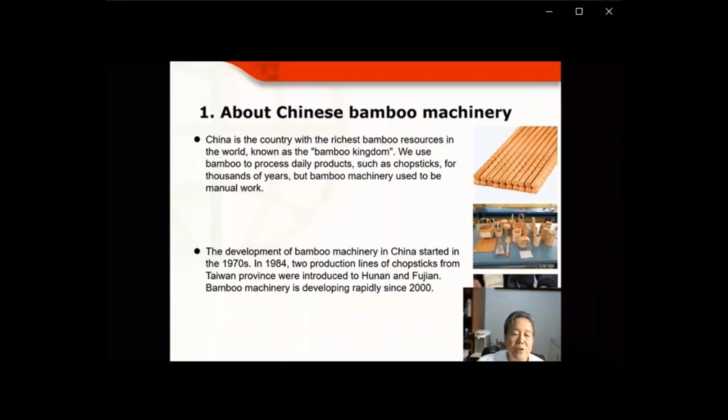Bamboo machinery in the world. First, I would like to introduce what bamboo machinery is. We define it as all the machines and equipment which deal with bamboo. The difference between bamboo processing machinery and wood processing machinery: the same points for lumber and wood-based or bamboo-based panels include hot press, saw cutting, milling, sanding, and drilling. Only used in bamboo industry are split off, wire drawing, extraction of bamboo juice, and textile processing. Why? Because of the difference in bamboo physiological construction, chemical components, and product uses.

The world status of bamboo machinery: for bamboo machinery research and development, there is a great regional difference across the 3 largest bamboo areas. In APAC, there is relatively complete processing machinery and equipment for bamboo crafts, bamboo furniture, bamboo construction, and bamboo papermaking industry, mainly in China, following wood processing machinery. Now it is half automatic and mechanized.

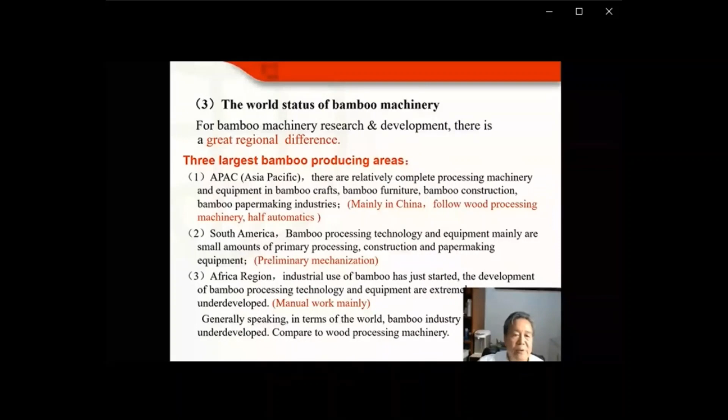The development of bamboo industry in Africa is very slow, hovering in the stage of agricultural culture.

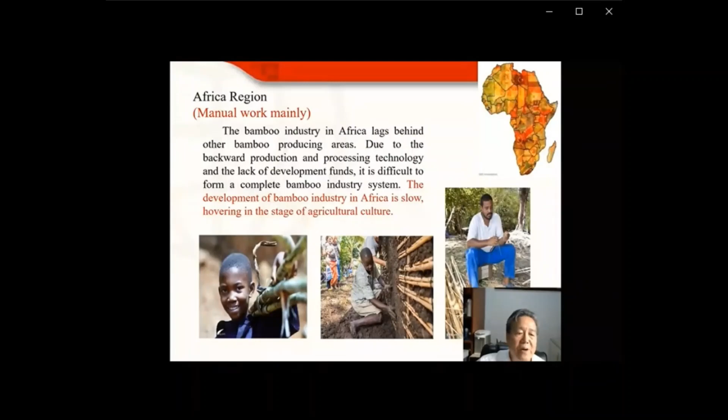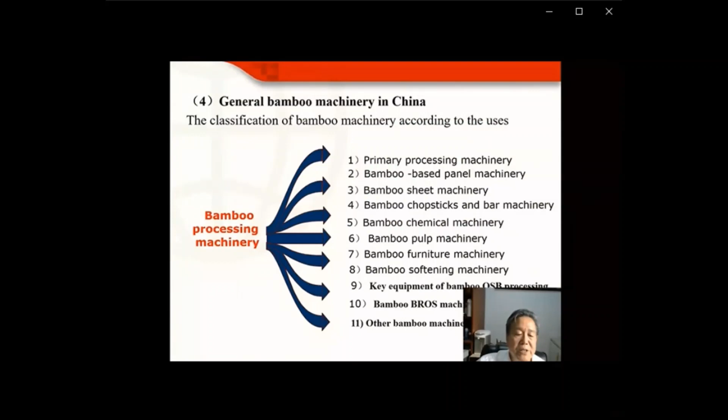General bamboo machinery in China. The classification of bamboo machinery according to machine uses. We have 11 kinds of machinery in China, including processing based panel, sheet, chopstick, bar, chemical, pulp making, furniture, and softening machine, and also OSB machinery. Here is a special technology about bamboo processing: bamboo BROS machinery. Later, I will mention what's bamboo BROS. Primary processing machinery: sawing machine, green shave machine, splitting machine.

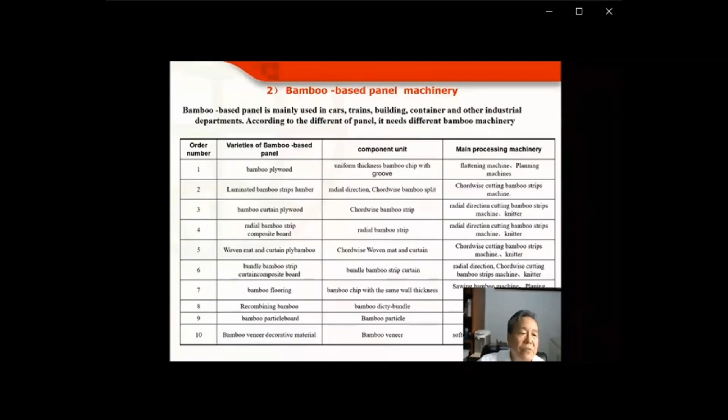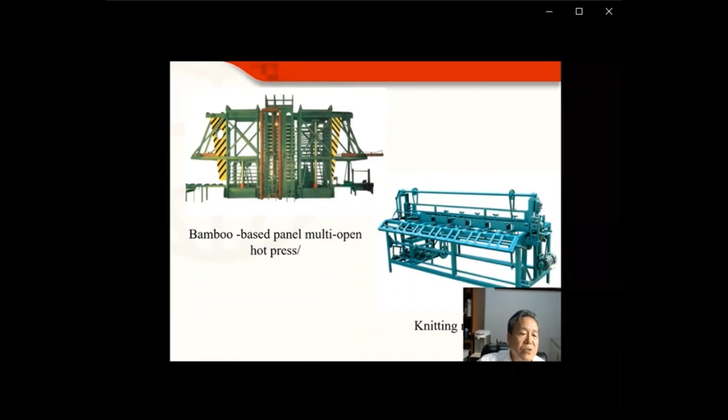Bamboo-based panel machinery. We have a lot of kinds of bamboo-based panel machinery in China, and we also set up a lot of production lines. Here I give you 10 kinds of different bamboo-based panel machinery: a multi-open hot press knitting machine, bamboo flooring machine, multi-blade saw, floor trimmer, forming machine, floor milling machine.

Bamboo sheet machinery. In this field, the machine is a high degree of automation and world advanced level.

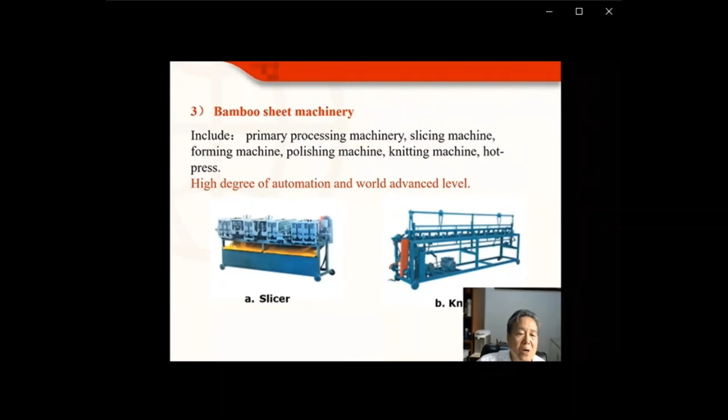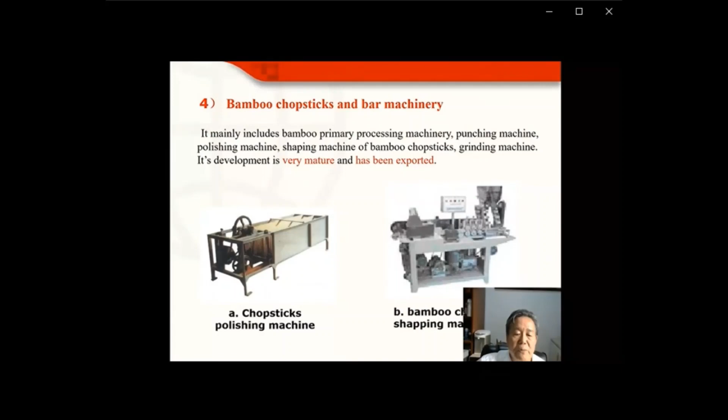The bamboo chopstick and bar machinery is very mature. A lot of machines have been exported: chopstick polishing machine, chopstick shaping machine, bamboo chemical machinery.

The level is just behind the wood paper making machinery, but in China it's leading the world. Here is a hot refiner, then bamboo pulp washer.

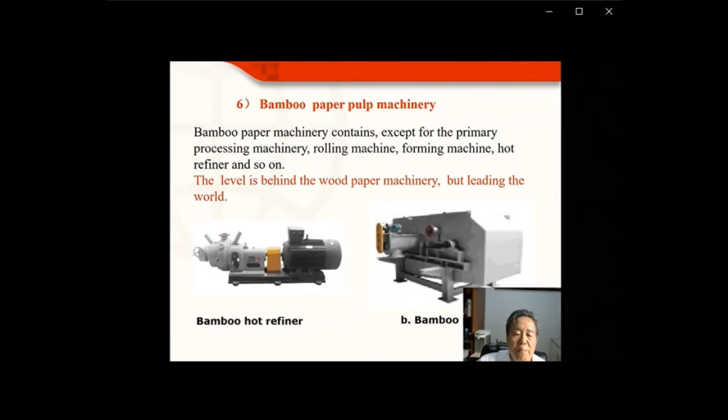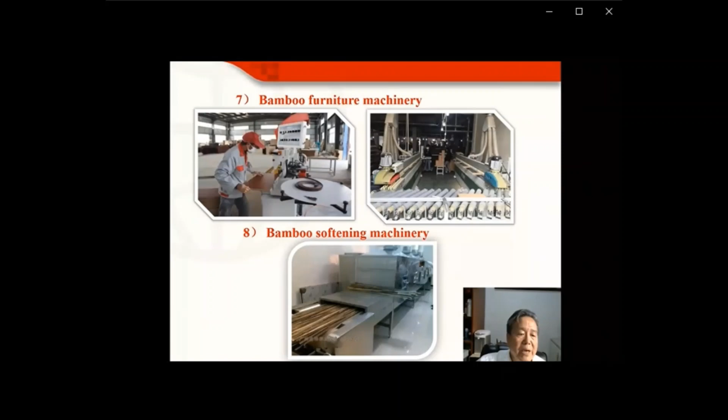Bamboo furniture machinery. Normally we make small furniture with bamboo softening machinery. It's quite different from wood. We can make bamboo softening.

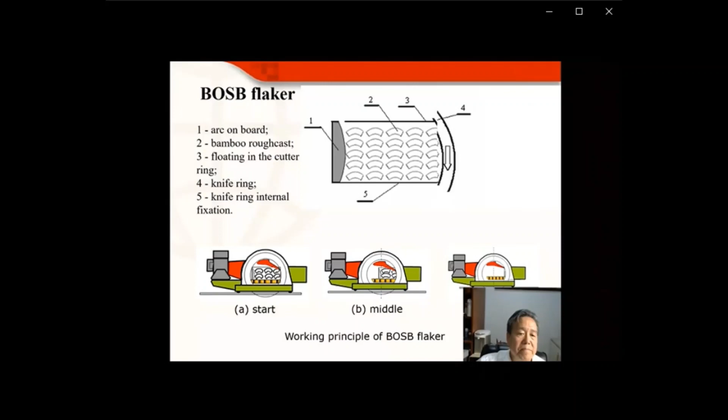And here is OSB processing. We use bamboo to produce oriented strand board. We call it BOSB. The picture is the bamboo flaker. You can find how the bamboo flaker works, like this.

Here is the bamboo OSB, the first board in China. Bamboo recombining the original status - we call bamboo recombining in original status BROS. I invented BROS in 2006. We can recombine bamboo pieces in original status without making it into fiber or particle.

Here is a milling machine and a high frequency press. The shaping machine of 6 side, finger joint machine, assembling forming machine.

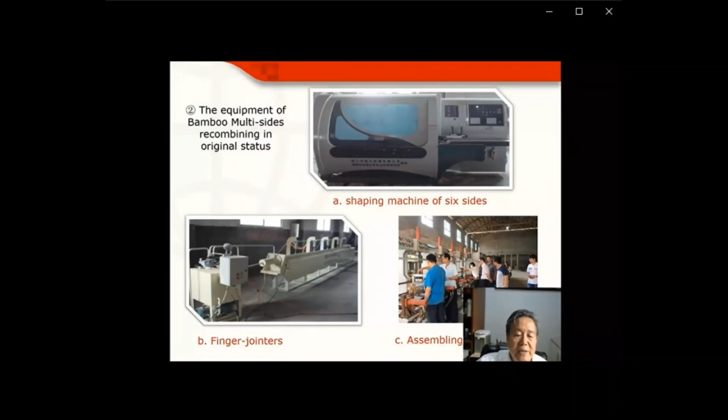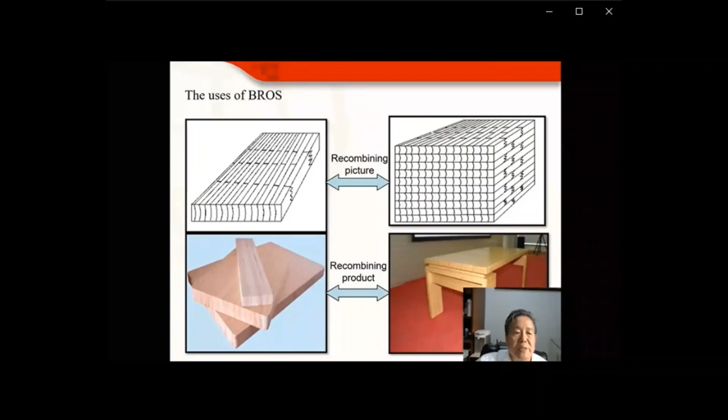We can use the BROS to make furniture or construction. Here also we can make the BROS board into BROS lumber. Here is a table. On the picture, you can find all the furniture were made of BROS material.

Other bamboo machinery: bamboo silvicultural machines. Here we give you 5 kinds of machines. Most of them need to be solved, to be developed in China.

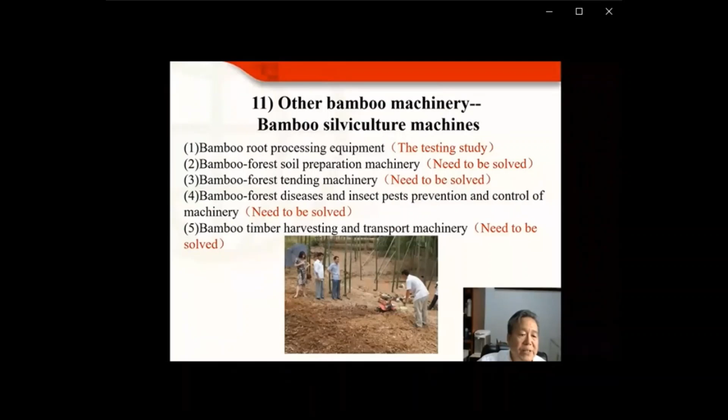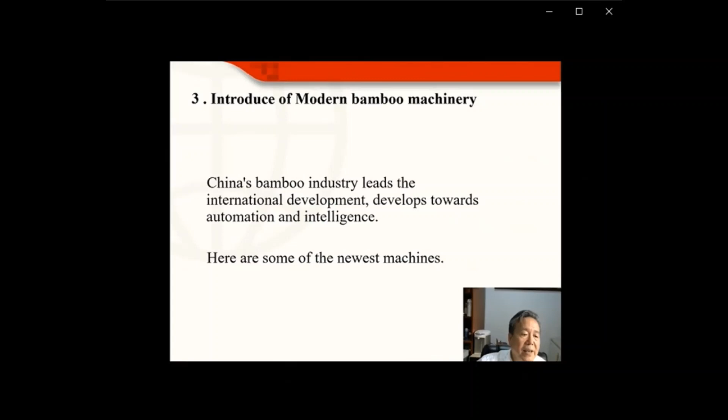Now I would like to introduce some of the modern bamboo machinery in China. China's bamboo industry leads the international development, develops towards automation and intelligence. Here are some of the newest machines. You can see them on the video.

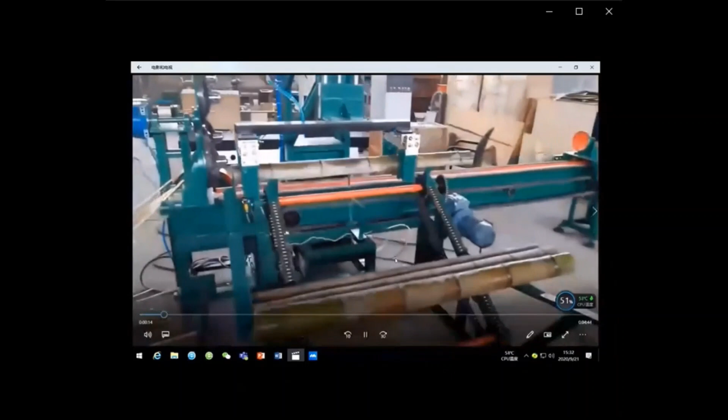Here is automatic bamboo splitting equipment. For the older ones, splitting machine, in order to choose the right knife, need the operator to measure the diameter of bamboo pipe by hand. With high labor and poor safety, the new machine can finish automatic feeding, grading, knife changing, and alignment.

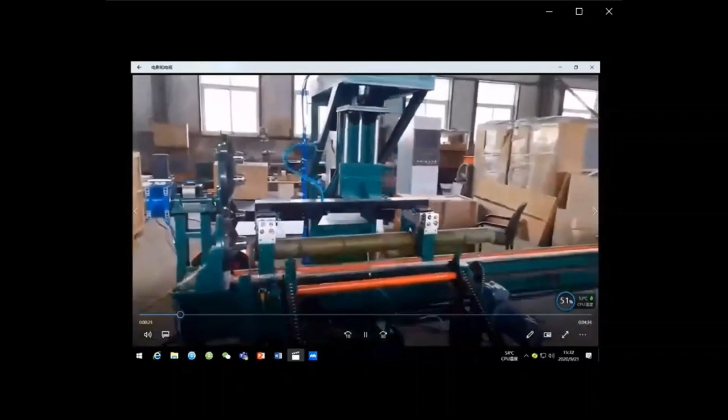You can see here to measure the diameter by the machine hand. There are 4 star knives.

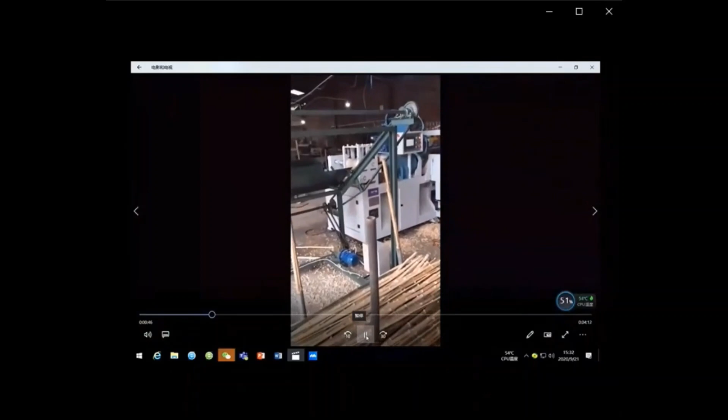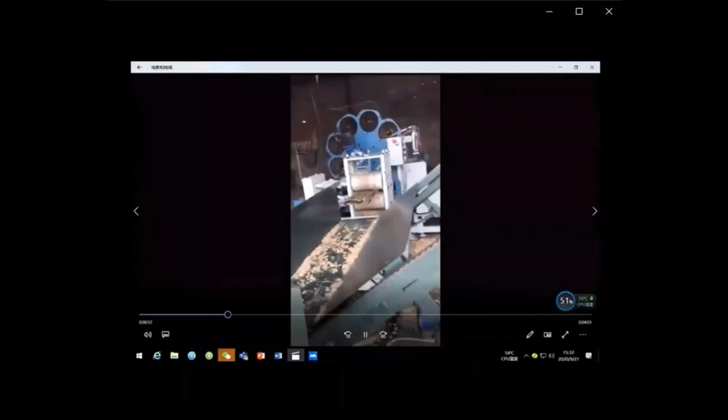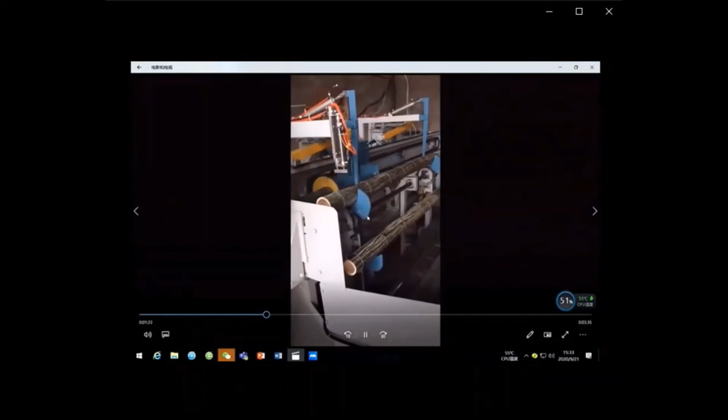This is another kind of splitting machine with automatic collection of bamboo strips. You can see here there are 10 star knives output here, collecting the bamboo strips. You can see here is a sensor to measure the diameter of bamboo and choose the right knives. Here to change the star knives, altogether 10 star knives.

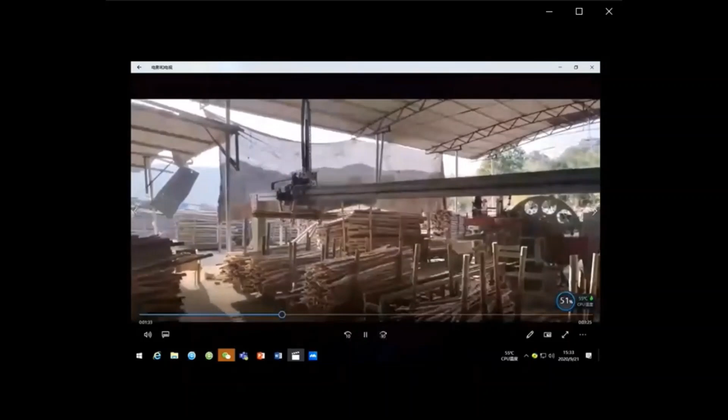This is automatic sorting robot. After bamboo pipe splitting, according to the wall thickness of bamboo, it can be classified automatically.

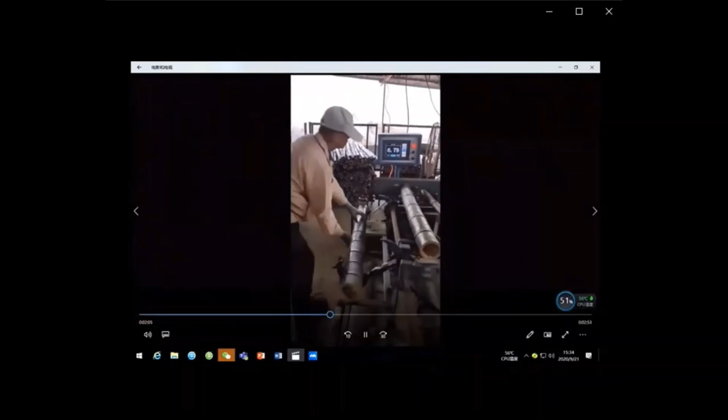This is the automatic measuring system of bamboo wall. You can see how many millimeters of the bamboo wall. According to the different bamboo wall thickness, they are classified and stacked.

You can see here is a sensor to measure the thickness of a bamboo pipe wall.

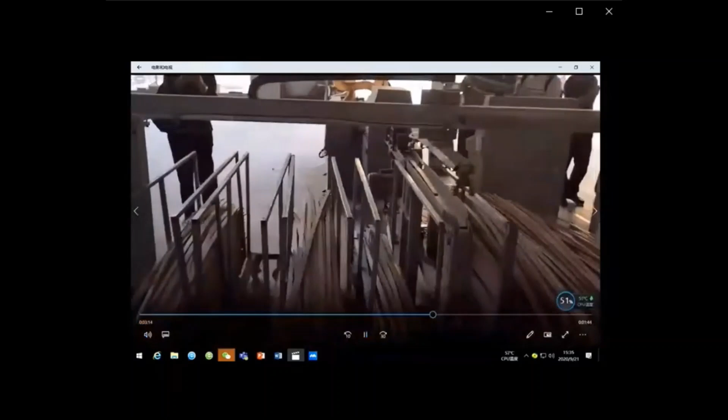This is the automatic color sorter. According to the different color of bamboo strip, they are classified and stacked by machine automatically, by laser, detecting the different color to the different stacks.

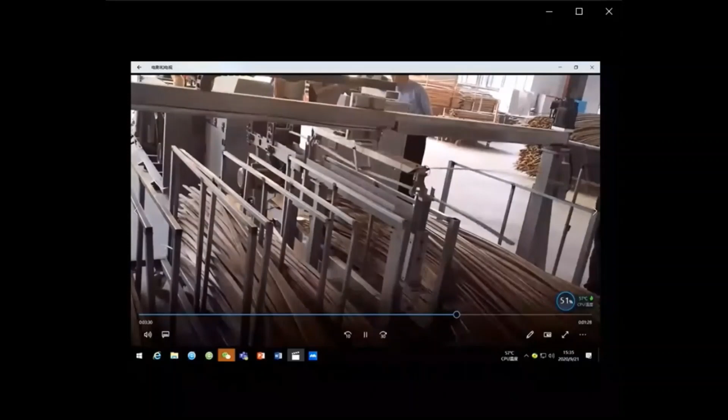There are many kinds of advanced bamboo machines. Due to the time limit, I only introduce some of them here.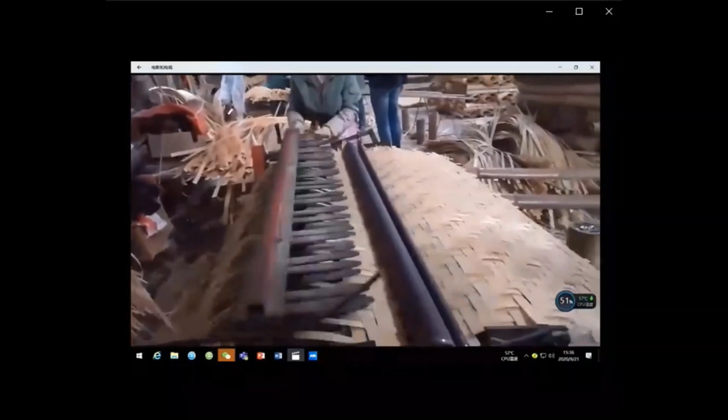The future of modern bamboo machinery in China. We are doing a lot of research on bamboo machinery. In the future, China's bamboo machinery will develop in the following directions.

Number 1, harvesting mechanization. Now it's all manual logging and transportation on the mountains. We need mechanical cutting and transportation, and even preliminary processing in the mountains.

Number 2, automation. Bamboo processing plants need automation equipment to reduce labor cost. Number 3, intelligence. Intelligent control is the only way for the development of the bamboo industry. Number 4, environmental protection. Bamboo processing must be environmentally friendly.

Number 5, save raw material. At present, the waste of raw material is very large, and the utilization rate of bamboo is less than 50%.

Number 6, bamboo robot. Bamboo robots are very important both indoors and outdoors.

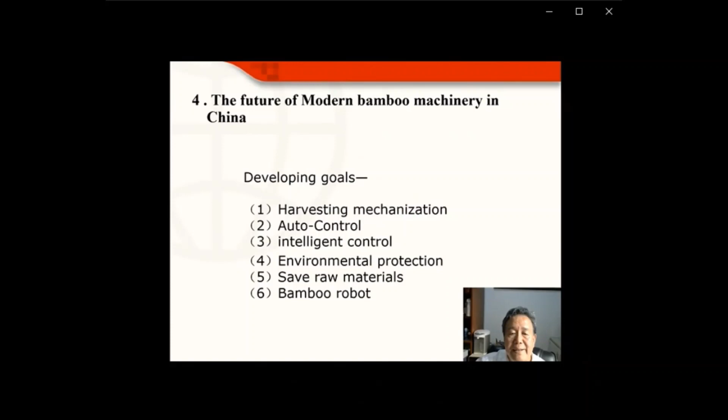Okay, thank you Professor Fu for your excellent presentation. Professor Fu reviewed the history and development of bamboo machinery in China and in the world, and also the future of bamboo machinery. He introduced different bamboo machines, and also mentioned his invention, the bamboo recombining in its original state. And due to the higher and higher labor cost, we need more efforts to develop bamboo machines.

For bamboo plantation management, for example for harvesting and transportation, it was very impressive to see the automatic bamboo splitting machine from the video in Professor Fu's presentation.

Recently, last November, when I accompanied the Ethiopia delegation to Fujian and Yunnan, we also saw this automatic bamboo splitting machine. It can select based on the bamboo diameter, and also sort the bamboo based on the thickness of the wall, increasing efficiency and reducing waste.

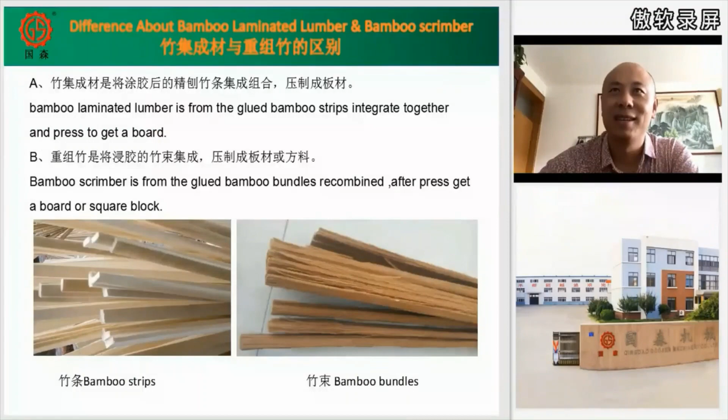Here is the bamboo laminated lumber process flow, step by step: bamboo select, then cut off, tube splitting, rough planing, then a choice of carbonizing or bleaching, then dry and fine planing, then glued. The strips are pressed to get the bamboo board. After that, we can give some deeper processing to make the products we need.

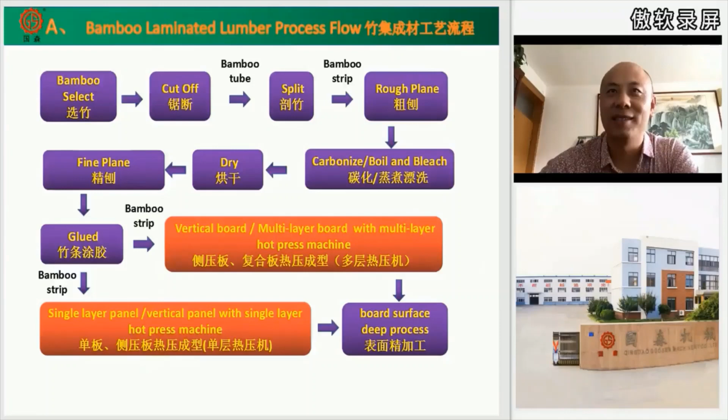First step, bamboo select. Here we must choose adult bamboo of the appropriate age, meaning no significant mold, aging, or wormholes - good quality bamboo tubes as the material.

Second step is cut off. Here we use the bamboo cutting machine to cut off the bamboo tubes to the length our board needs.

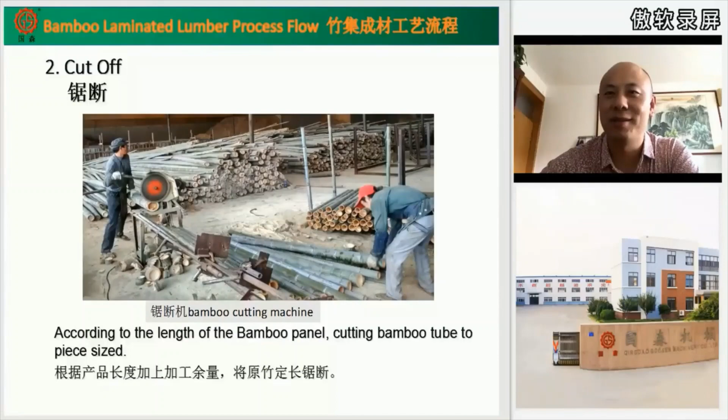Third is bamboo tube splitting. We use the splitting machine to split the bamboo tubes to get the strips.

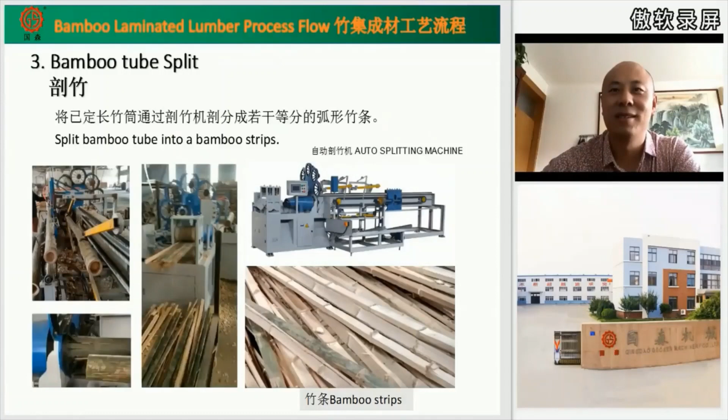Fourth, we give the rough planing. In this stage, we use the machine to get rid of the nodes of both surfaces and the skins of both surfaces, fixing the width of the bamboo slices to form great bamboo slices.

Here is the carbonizing. We use the carbide furnace. This machine gives high temperature, high pressure, and humidity to kill the insects, remove the sugars, and balance the moisture inside the bamboo strips. It also makes the color of the strips darker.

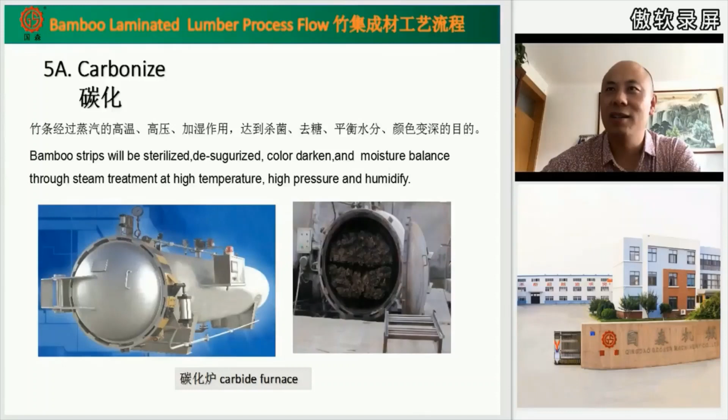Also, if you like the original bamboo color, you can choose bleaching, boiling, and brightening. Put the bamboo strips in hot water with some additive like hydrogen peroxide, then boil. This can also remove the sugar, balance the moisture, and unify the color difference.

On the 6th step, we need to build some dry houses. Here we give high temperature air to evaporate the water of the bamboo strips, reducing it to meet the process requirements.

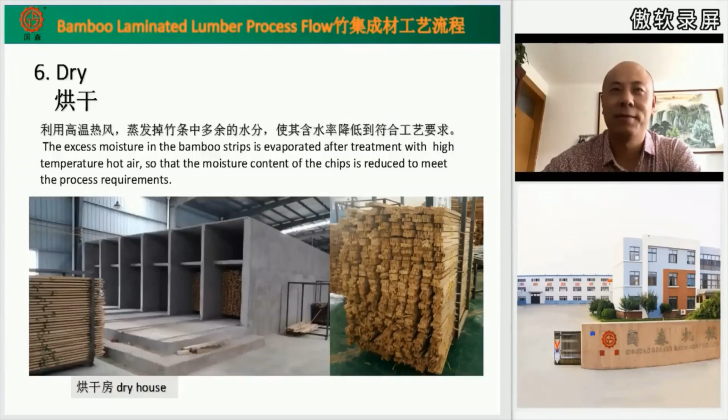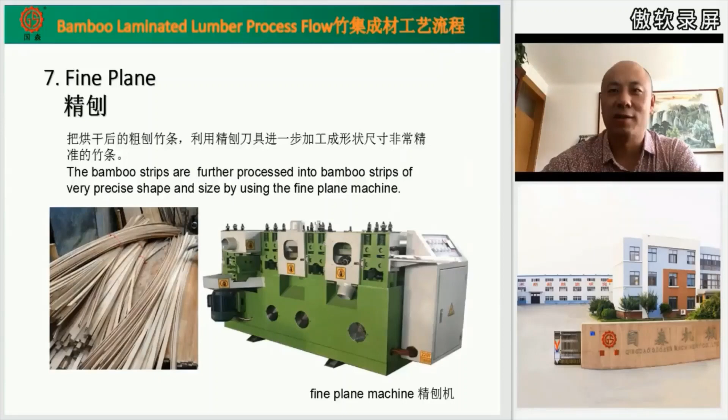8. Bamboo strips glued. After the fine plane, the strips are already perfect on the surface. Then we use the adhesive solution coated on the surface with this machine. This is the final step before the board press.

9. The core part is the line to press the board. We use the glued bamboo strips, integrating and composing them into a slab, then put them in the press machine, giving high temperature and pressure to make them integrate together. Then we get the board slab.

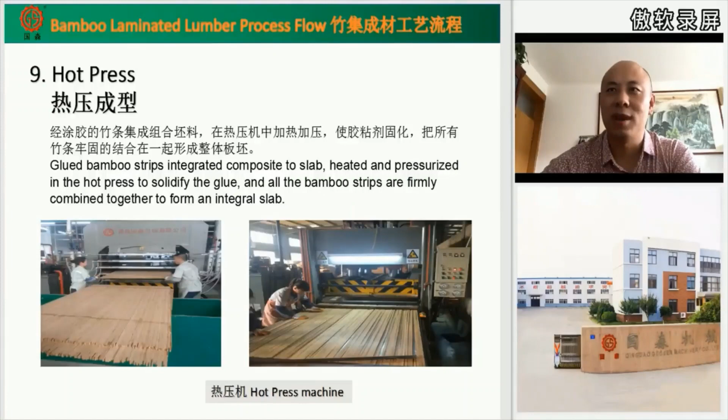The 10th step, surface deep process. According to the requirements of the different products you want to make, you can do some deeper processing using standard machinery: sanding with a sanding machine, milling, slotting, and final painting on the surface. Then you get a very perfect, economic product you can sell.

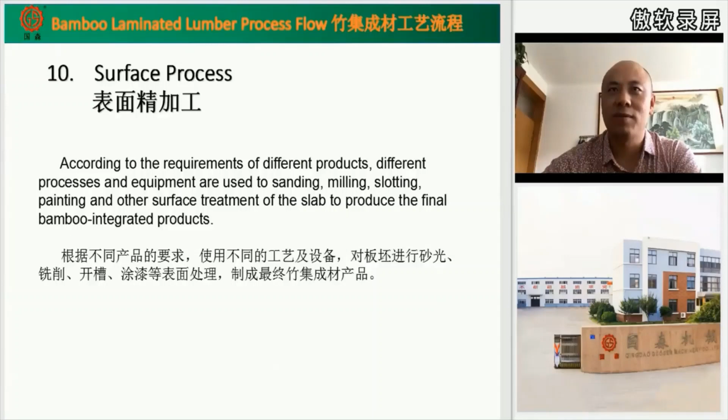Let's move to part B, the bamboo scrimber process flow and equipment. Let's see the process flow first: bamboo cut, then get sized tubes and splitting, then get strips, crushing, carbonizing the bundles, and drying, then glue dip, and dry again. Then there are two choices: hot press to get the slab board, or cold press to get the square block.

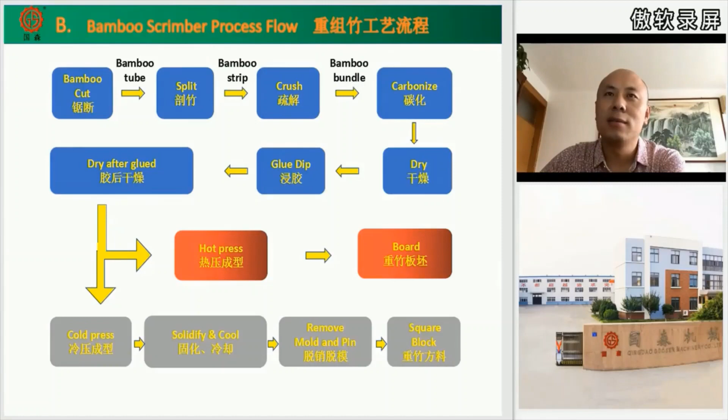The first two steps, bamboo cut off and splitting, are the same as in the bamboo laminated lumber process mentioned above, because both are used to get the bamboo strips. The third step is crushing. The crushing machine makes the bamboo strips into bundles and removes the outer and inner skins. The skins would affect the glue coating. Anyway, we get the bamboo bundles at this stage.

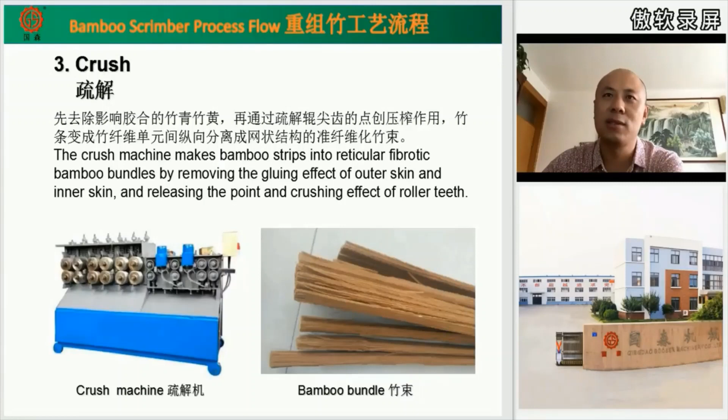Carbonizing is similar to what we mentioned before - it kills the insects, removes the sugars, and balances the moisture inside. The carbonizing furnace gives the high temperature and pressure.

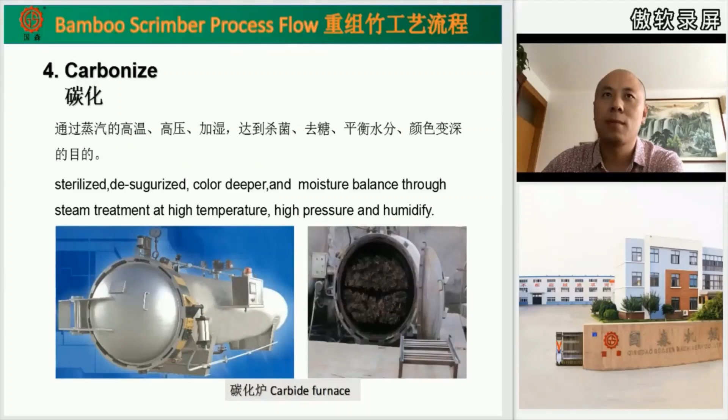Number 5 is dry before glue. I also need a blow dry house to dry the bundles, to remove the extra moisture inside and give space for the glue dip inside later.

And the glue dip - this is the automatic glue dip production line, instead of the traditional manual operation. This machine just needs one person to operate. All procedures are automatic - people put the bundles into the cages, then press buttons to operate all the way. So that can give very exact glue dip time.

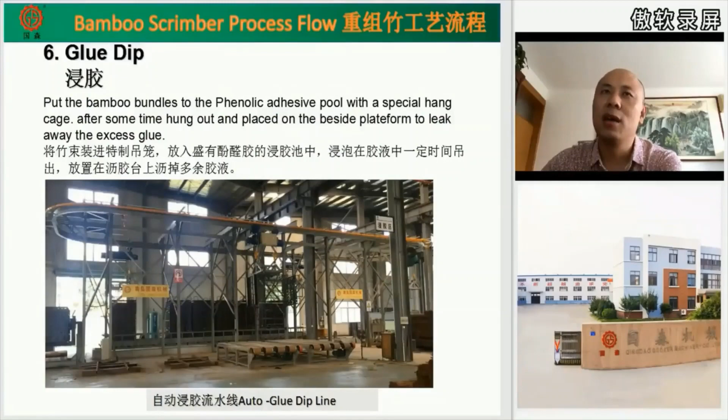And also can follow the strict technology requirements. Number 7 is dry after glue. After gluing, we need this dry tunnel to dry the bundles again, and make the final moisture of the bundles reach 12 to 15% to meet our technology process requirements.

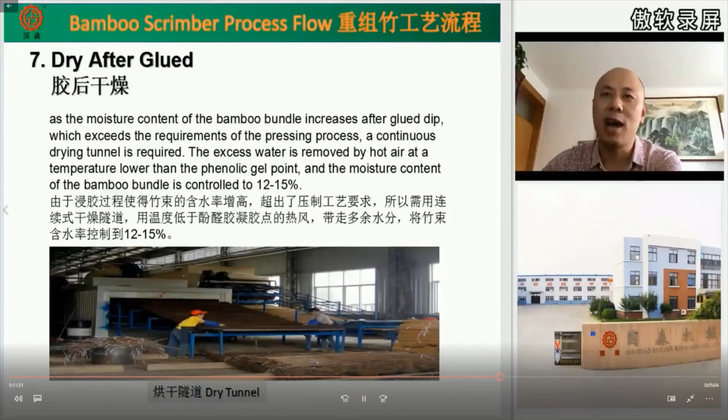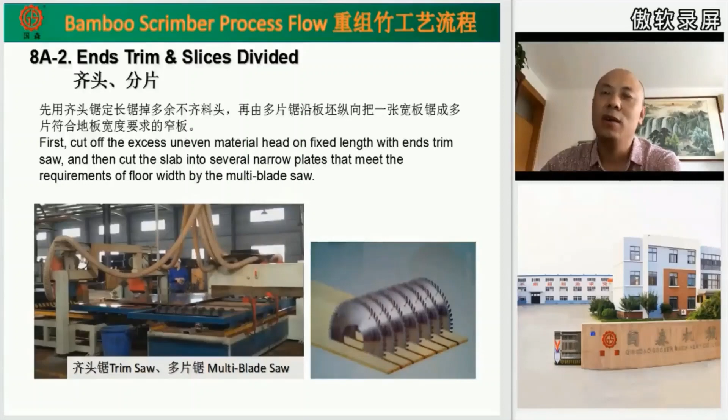This is cold press. The cold press machine also puts the bamboo bundles into the machine, but it needs a mold - it needs a U-shaped mold. The cold press machine will press the bamboo bundles into this mold with high pressure.

And then we'll lock a lid, a cover lid, outside to lock it. After that, the mold with the material will be put into the curing tunnels for a certain time, then the adhesive will solidify inside, and the bundles will become a whole square block.

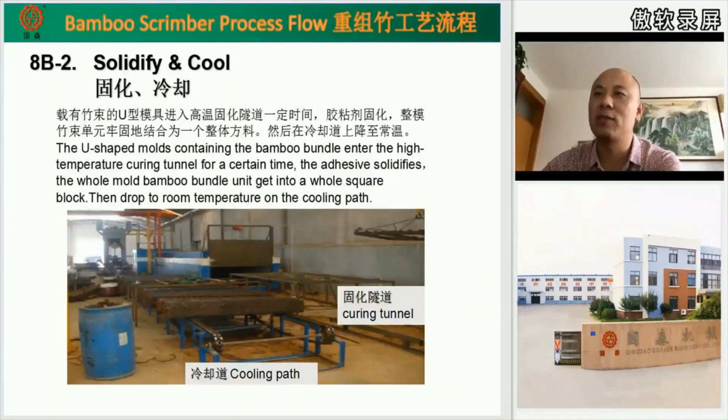After that we'll get it out and put it into a cooling path. Then we need the demolding machines to remove the mold, the cover on top, and the pins that lock it. Then we get the block.

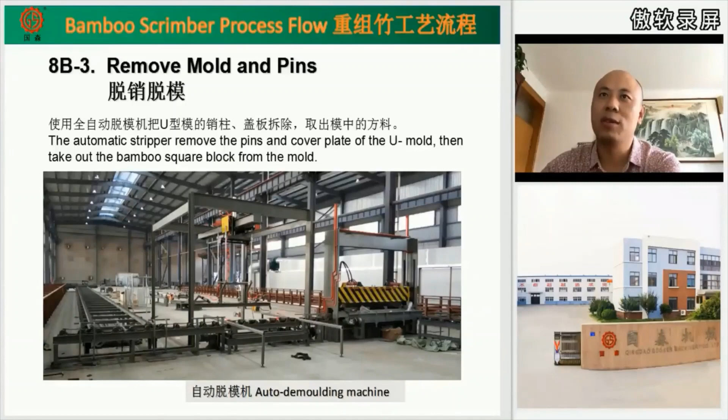After that, we have the automatic stacking machines to stack the blocks on the pallets. Then we can use a forklift to move them to another place.

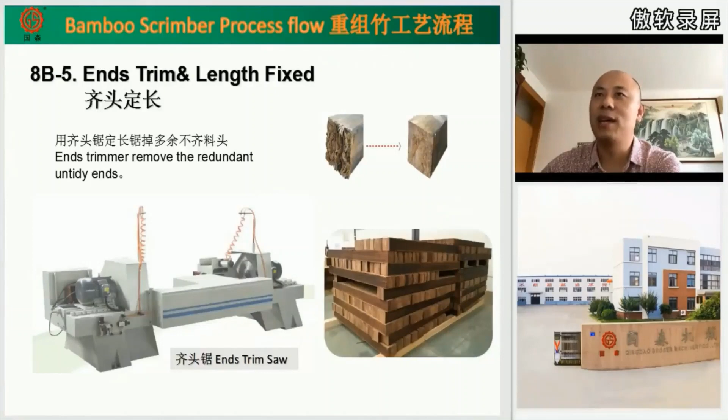Then this is also a saw to trim off the two ends. And also we need this surface sander to remove the uneven material on the surfaces and make the surfaces of the block smooth.

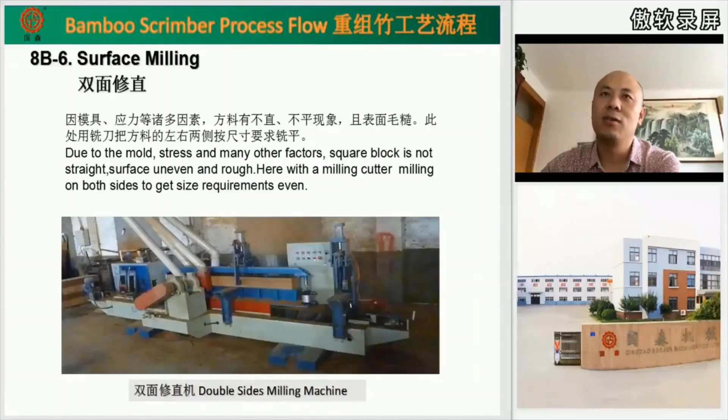After that, we need the balancing rooms. We put the final product, the panels, in the balancing room according to process requirements, and we adjust the room's temperature and humidity to make the panels release their interior stress and balance the moisture inside, to make the panel stable in all its characteristics.

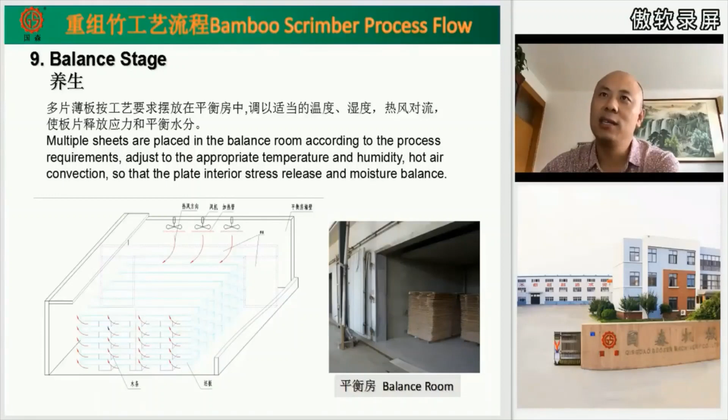And after that, we can do other deeper processes like sanding, milling, slotting, painting, and other surface treatments, based on our product's requirements.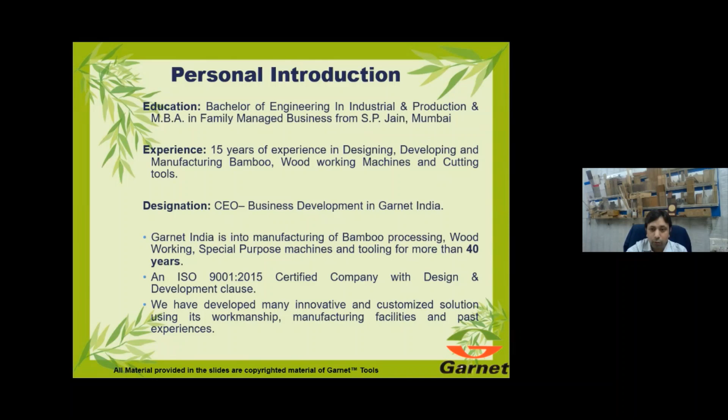We have very skilled manpower as the people have been working here for a longer time. Just a brief introduction of our company: we have been in the field of developing these machines, and we are basically more into turnkey solutions.

We check your raw material species, then we decide and give you suggestions on what kind of products are feasible from your material. Thereafter, we suggest what machines are suitable for you and your people, as the skill set varies from one country to another. Sometimes people are more skilled in one area and may not know how to process bamboo, so we train your people on how to make the product properly, and we also help install the machines.

We have more than about 10,000 installations in India and abroad. We have more than 1,500 types of cutting tools, as we supply toolings for ferrous, non-ferrous, wood, bamboo, and other purposes. Bamboo machines have been developed as per customer requirements, like the species and the kind of end products, and the development always goes on. Special purpose machines are basically the composite machines we make for various composites available in the market.

When we talk about the evolution of bamboo machinery, the first phase of the presentation: bamboo processing machines depend on various factors to be decided. What kind of machines we need for a production factory varies a lot from a factory which is looking to make a prototype or probably looking to make a new kind of product.

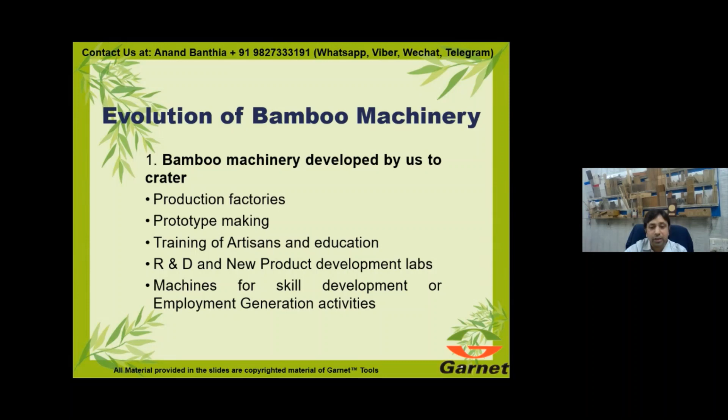So our machines are designed for each and every usage, species, or end product requirement separately. Machines for skill development or employment generation activities, like manual or semi-automatic machines, are also available. When we talk about machine design or the kind of machines required, they basically vary as per factors like the type of bamboo available, that is the species of bamboo. Like in India, we have Balcoa, Asper, Tulda, Hamiltoni, Bambusa bamboos, Dendrocalamus strictus, and other species.

Products that are marketable, like in India, incense sticks, boards, and smaller products used for office wares, tablewares, similar products are required. Skill set of the people matters too - if your people have knowledge of woodworking, then a product related to furniture would be more suited for you.

In a similar way, we can design the products as per your need. Machines are basically decided as per these below factors. If you require labor intensive, that is the machine would do less processes, the labor would be required more for feeding and other purposes.

Power intensive are the machines like the lumber, like the strand woven, like the board making and similar machines. Multi-product based machines are machines like for furnitures, handicrafts, like one machine can be used for making furnitures as well as for the handicrafts as well.

Simple, easy to use machines that can use multiple species. Like we have our machines working in Mexico that are using variety of species from Gigantus to Asper to Guadua to Balcoa. And we help solve the bottlenecks. Like if there is some process that is a problem to you, we can design a machine to solve that problem.

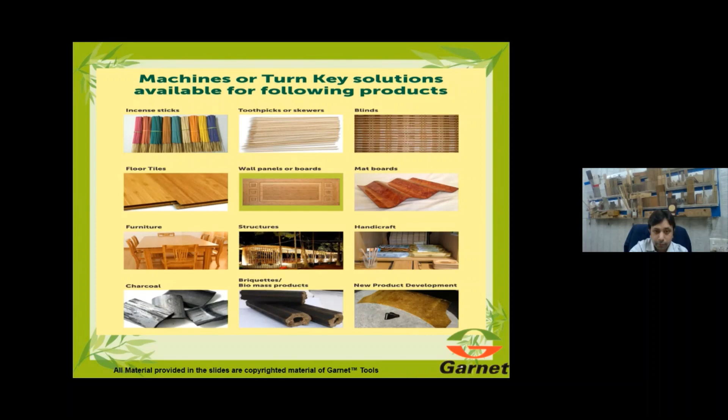One of our example of our machines that does a lot of operations in one machine is called universal. Universal means one machine does all. So this is one of a kind of machine which does a lot of operations on wood as well as bamboo in one machine itself.

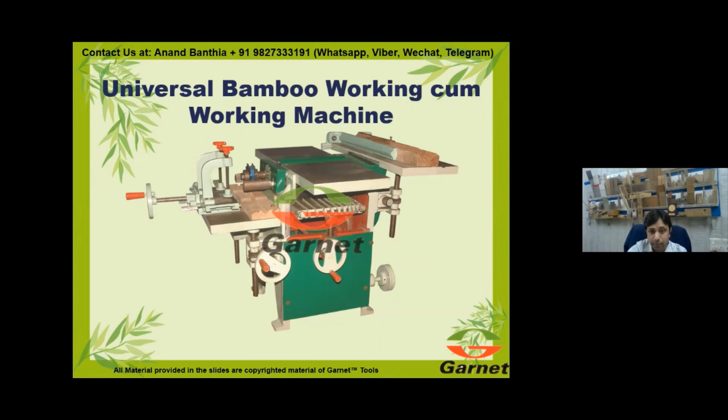As you can see, there are various operations that you can do with the same machine. This machine is a very low investment machine, but can handle more species around the world. This machine is working in Mexico, Ethiopia, India, Southeast Asia, and other places as well, as this works on most kind of bamboo, most kind of species, and most kind of products.

Just to start with, on the top left, we can see bamboo cutting, splitting, outside knot cleaning, inside knot cleaning, rough planing, three-side planing, sanding, that is to clean the surfaces, angle cutting to make the frames, slotting and drilling for the joining, grooving for the slot making, cladding and other purposes.

So this is one of a kind machine that we developed about 25-30 years back, which can do a lot of operations. In the long run of making these machines have become more and more user friendly and can be adopted and made as per the species involved.

One of a machine that is very different from other machines is a bamboo machine that makes bamboo into a round, even shape. Because at most places where there is a tropical bamboo or there is a sympodial bamboo, which has got a range of diameter difference, it is very difficult to process it. This machine makes diameter of the bamboo even.

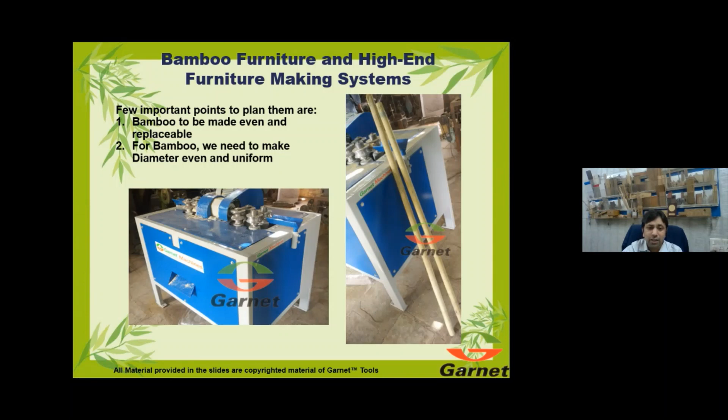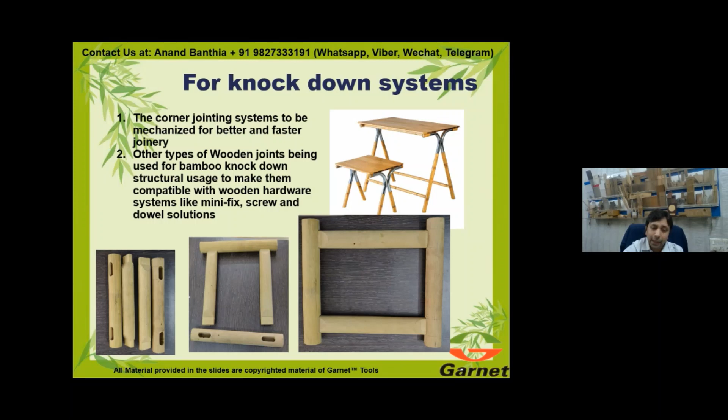We also make presses, heavy duty and light duty, customized as per requirements, from lumbers to laminated bamboos to smaller size composite presses for making bamboo plastic composites and related composites. These presses are made on order, may be required for research or other purposes, or mass production purposes, so we make them regularly as well.

For every press, the end product requires a lot of finishing to make into a final product, which may be panels, floor tiles, board finishing, and boards of various other kinds. So these are the machines required to make a finished product: four-side shaping, sanding, UV coating to give a glossy or matte finish, and curing, which hardens the coating very fast so it can be used for mass production thereafter.

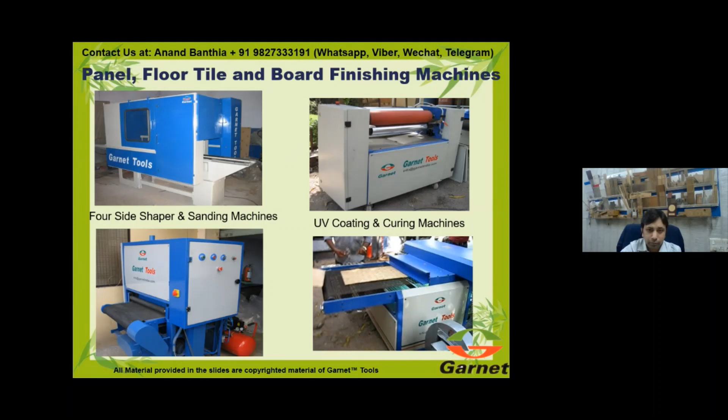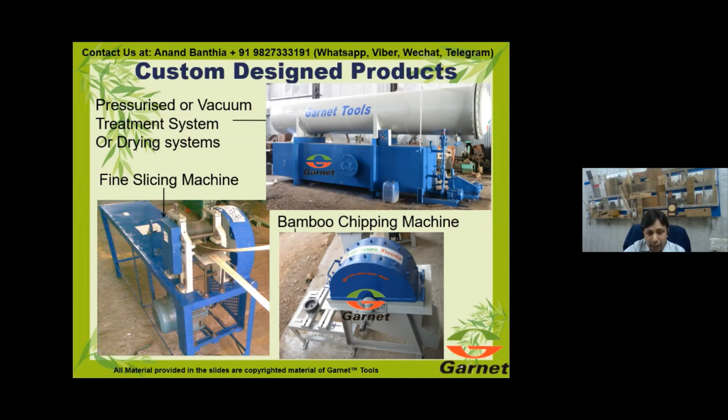The chipping machine shown at the bottom was supplied in Mexico because the customer wanted to fit their own motors, so the machine was provided without a motor. The bottom left shows a fine slicing machine for mats and other purposes, but the customer wanted the product and slice to be kept on the machine itself, so we provided material handling solutions along with it.

Next, when these machines are designed, the major thing to take care of is how and where they are being used. When used by an entrepreneur or a startup, the requirements are very different. They use intellectual property rights like patents or trademarks, so they want their technology kept with them, not spread to others. We help them by signing non-disclosure agreements, understanding their technology, and designing machines as per their prototypes or mass production requirements, helping them solve their bottlenecks.

The next problem is what kind of raw material they want to use and what finished product they want to make, so we help design machines as per their raw material and finished product requirements. For bigger organizations like government initiatives, training programs, or R&D institutes, we design machines specifically for them, because an R&D institute doesn't just require machines for a single purpose or species. Their requirements can range from one species to many, and from one type of product to hundreds of types, so we design machines as per the products and the raw material and finished product requirements.

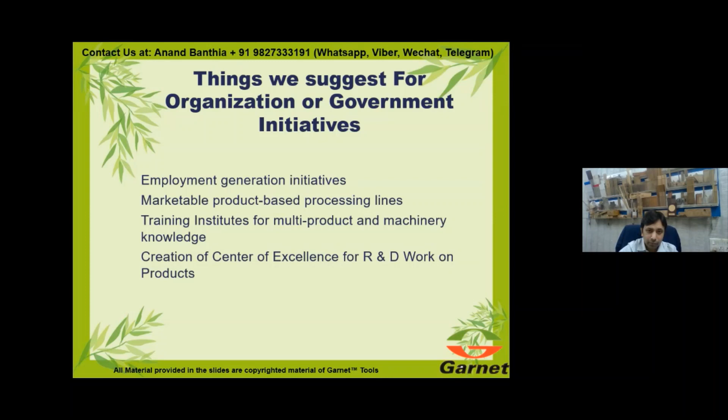In the second phase of my presentation, I discuss how bamboo product development has evolved from low cost products like houses, basketry, bows and arrows, and flutes, to present day products and what the future holds. In the 21st century, we see laminated bamboo board furnitures, boards, laminates, structures, and round bamboo products like incense sticks, blinds, and skewers being made.

When we talk about today, the products that excite us more in bamboo are the bamboo brushes, the bamboo tableware, the bamboo composites that are replacing automotive or aeronautical products, bamboo board based products that are very different, not like flooring or panels, but chopping boards, trays and similar products. We help a lot of companies make these kinds of products that don't require huge mass production but are very specific to the market they want to cater to. Bamboo activated charcoal, bamboo normal charcoal, and bamboo briquettes are also among them.

What do we see as the future of this industry? When we talk about bamboo products, innovative or newer products are the future. Newer products mean higher value addition - they get more value out of the product and more profitability. So products that are more profitable would be the future products.

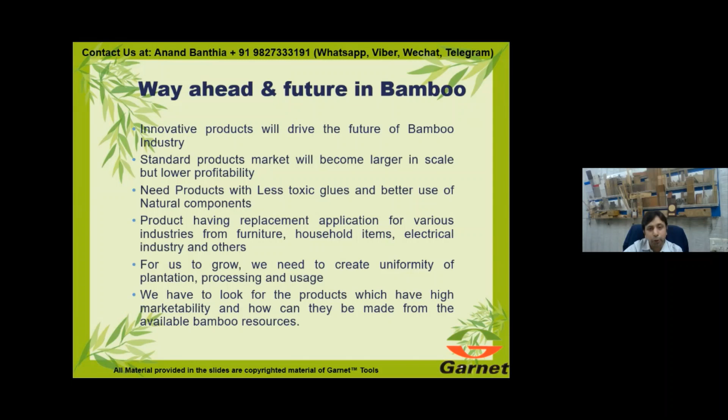What are the newer developments happening in the processing industry? Yes, bamboo machines and processing are ever-developing fields. We are always looking at customer feedback, developing machines that require lesser labor, that are developed as per the bamboo available and as per the finished product to be made. If we require automation, feeding systems, conveyors, automation systems are available. Single person handling multiple machines is always needed.

Nowadays, people are giving more importance to the finishing line of the product, like laser marking and CNC programmed machines for shaping, so that we are able to customize each and every product as per the customer requirement.

For startups, we are also providing business-based consultancy, product-based consultancy, and processing solutions as per their bamboo products. Smaller prototype making and multi-purpose solutions are always available. We have bamboo laminated board and flooring based panel lines starting from a very low cost, equivalent to a small hydraulic press costing $30,000 or more. Customization is always available because these machines need to be customized as per the bamboo - otherwise they won't last on general parameters.

We are always there. We hope we can all grow together and promote bamboo and its products. Thank you. If you have any questions, I'm always there to discuss them.

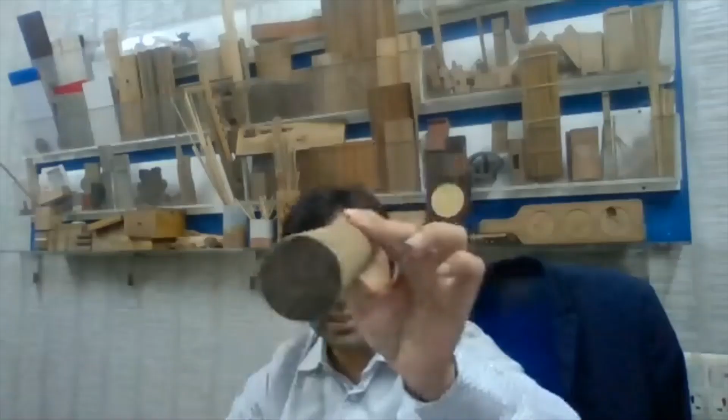This is a round bamboo. It's like wood, solid, so we can use it directly. I saw this, and this has been turned in our factory as a trial. So that is possible, example in our exhibition room in Beijing. So, Professor Fu, can you give your opinion how we can use this solid bamboo?

Yeah, Professor Fu, please. Here is a bamboo lumber, with arc shape. Can you go to the camera? We cannot see the sample, we can only see your face. Sorry, no, we see, we saw it, we saw the sections. Also like this. Like this, you can see.